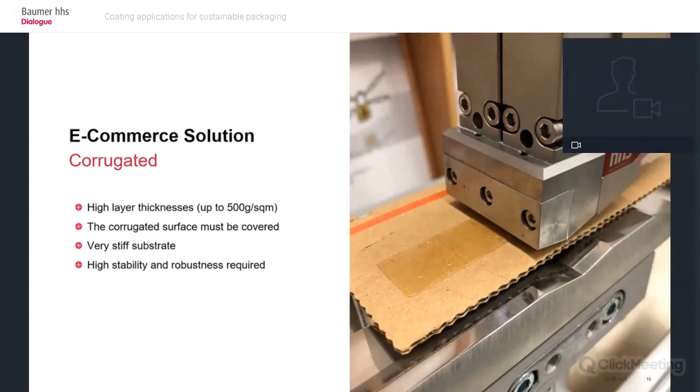There are many other applications of coatings with hot melt or pressure-sensitive adhesives. They are wraparound packaging, pouches, mailing bags, beverage cups, or paper shopping bags. Baumer HHS has already implemented solutions for all these applications - pure hot melt application, or in the often advantageous combination of hot melt with cold glue. In the following, I would like to present the Baumer HHS solutions for this area.

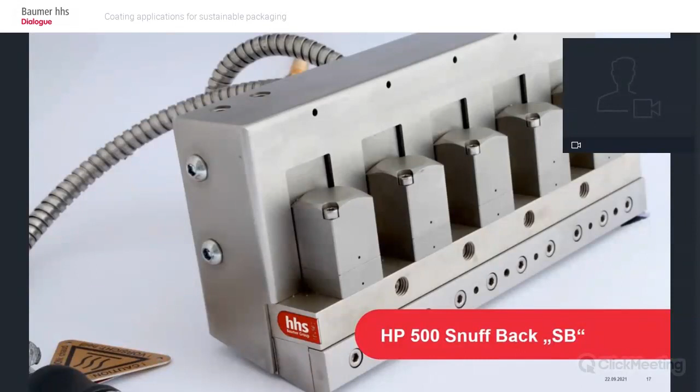As a rule, lower layer thicknesses are required, and the demands on adhesive application are higher. The top product of the Baumer HHS product portfolio for adhesive coating is the HP 500 Snuff Back Coating Head. This coating head is absolutely competitive in terms of quality and cost.

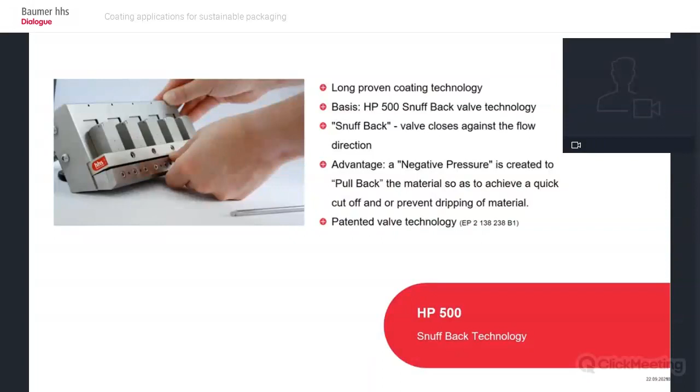What distinguishes this coating head? It is based on a proven technology. The coating head works with snuff-back technology. Snuff-back means that the valve is closed against the flow direction of the adhesive. This creates a negative pressure in the coating nozzle, with the success that the tear-off is perfect and possible dripping is avoided. The head is based on a technology protected as a European patent, which protects the compact design of the head.

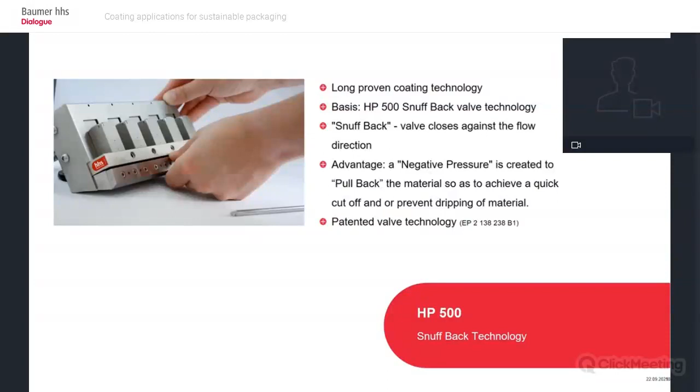The powerful model with electro-pneumatic drive offers extremely long life, reliable operation, easy maintenance, and high cycle rates with perfect track tear-off. The head has the smallest footprint of all coating heads in the market. The compact dimensions allow use even in constricted spaces. And the coating head has no external air switching valves. Nothing sticks out and can be damaged.

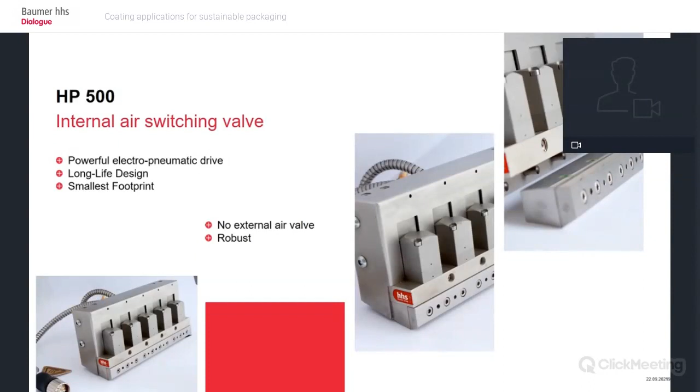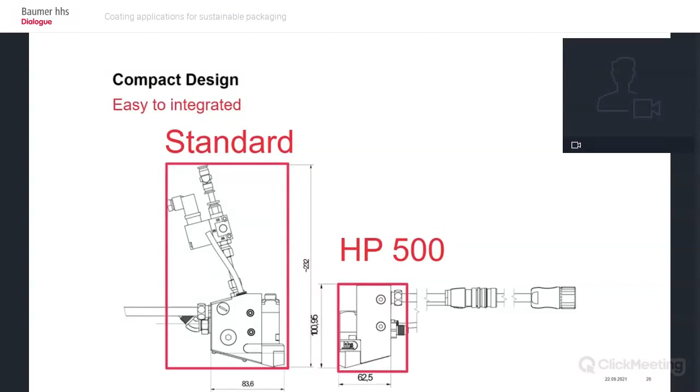The following graphic shows coating patterns that can be generated. Perpendicular to the web, the interruptions are generated by opening and closing the valves. Longitudinally to the web, interruptions can be created by trimming the masks.

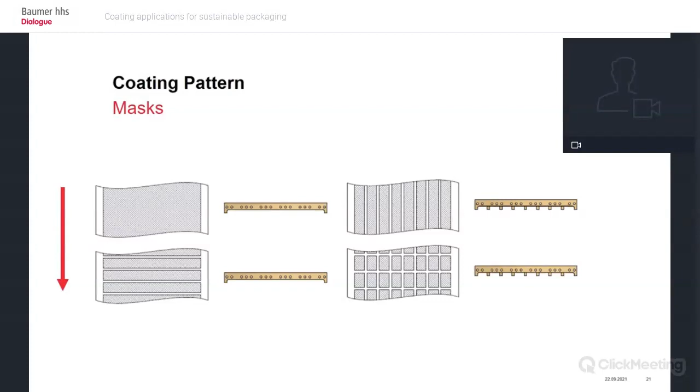We know from experience that there are usually only a few standard designs of the adhesive application pattern on the packaging machines. Therefore, it is often easier and faster to replace the entire coating nozzle together with the mask. Only a few screws have to be loosened. With only a few standard designs of adhesive application patterns, it is worthwhile to have a wide slot nozzle ready for each type of application. This saves make-ready time and reduces the error rate when changing masks.

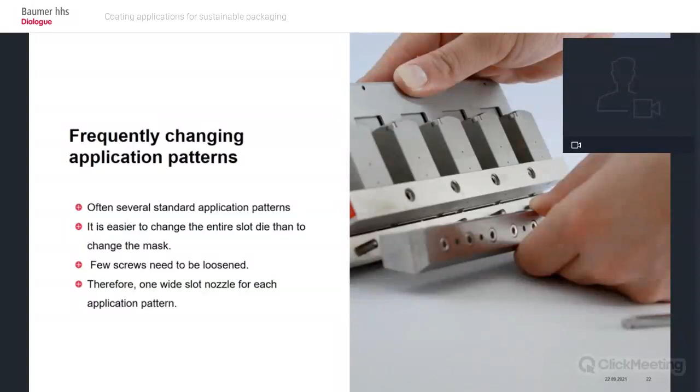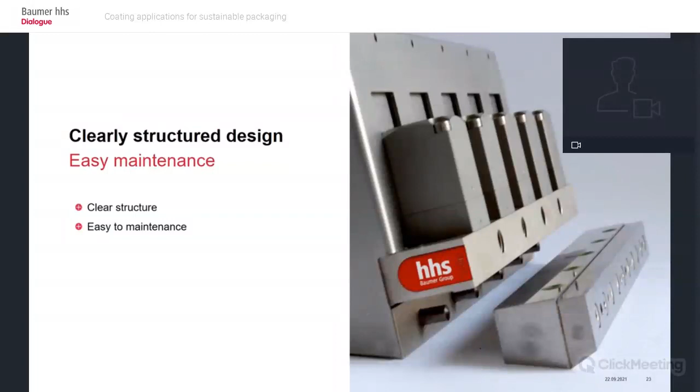The HP 500 coating heads feature a clean design. This is independent of the coating width. Anyone who has understood the design of one head will also know all the other HP coating heads. It is important to stock spare parts that are the same for all standard HP heads, of course, with the exception of the coating nozzle, which is width dependent.

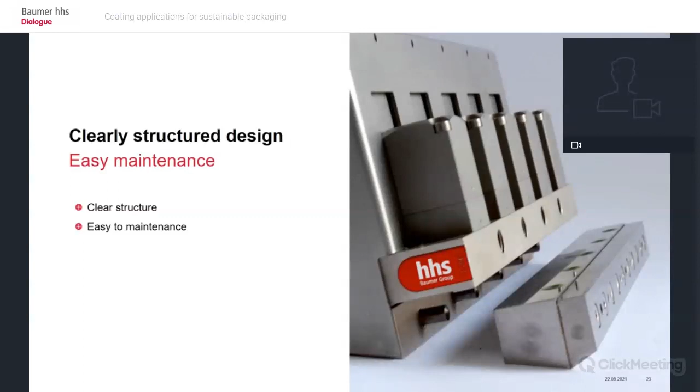The HP 500 standard coating heads are available in widths up to 500 mm, graduated in 50 mm increments. The individual coating width can be determined by the mask cut. Other widths of coating heads are available on request. The use of standard width coating heads offers you a lower investment volume, better availability in delivery, and in case of a replacement demand.

Coating has amazing parallels to art. In art, the artist's brushwork distinguishes between a blob and high-quality art. Some viewers regard some things as art, while others turn away from the work, shaking their heads.

In coating, it is comparable. The setting of the wide slot nozzle to the web determines the adhesive application quality. The angle of attack to the web plane and the immersion depth play a role. This is the brush handling of the coating.

Nevertheless, there are also very different demands on the application quality in coating applications. While one user demands the highest standards, wraparound applications often require good enough quality. We therefore need to know your requirements.

We would like to take you to our solution center. Here we do trials and customer demonstrations. We have applied a coating pattern here that we have dusted with graphite for better visibility. You can see the application of this adhesive pattern in the following film.

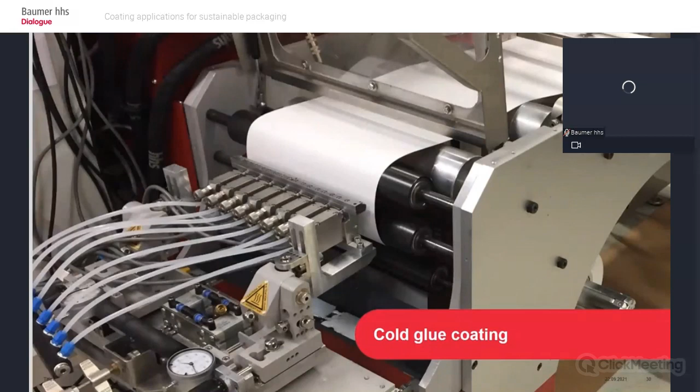An alternative to hot melt coating application is the coating application of cold glue. Baumer HHS offers a range of cold glue coating heads that feature fast switching cycles and excellent application quality. In the following we show a video of a patented cold glue coating head.

Please note the frame pattern. The following video shows the application of PVA in the form of a frame.

The application is carried out at different speeds. This is to show the possibilities that exist with Baumer HHS coating solutions. This particular head is also protected by a European and Chinese patent.

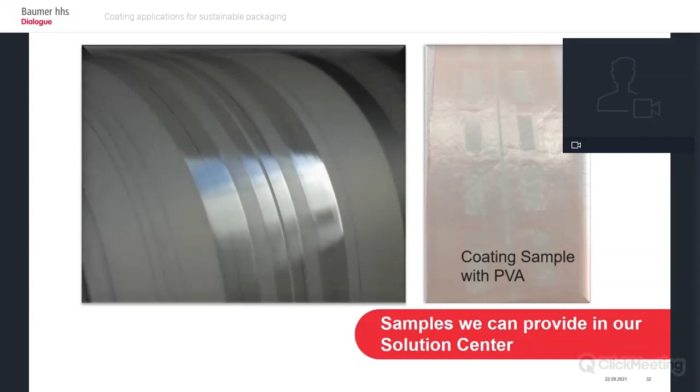The photos show a coating application with PVA. The coating was applied at 150 meters per minute.

Integration requires individual adaptation to the machine and its application. The coating head must be lifted off the substrate web during periods of inactivity to avoid burning the web.

Integration requires stringent project management. We are happy to work directly with manufacturers of the machines, equally in the case of retrofitting or new equipment. We generally look for partners for the integration and adaptation to the various requirements of the application.

Many questions need to be answered to achieve optimal results. For this reason, Baumer HHS has a coating team that handles these inquiries with confidence. Experienced personnel in research and development work in the background.

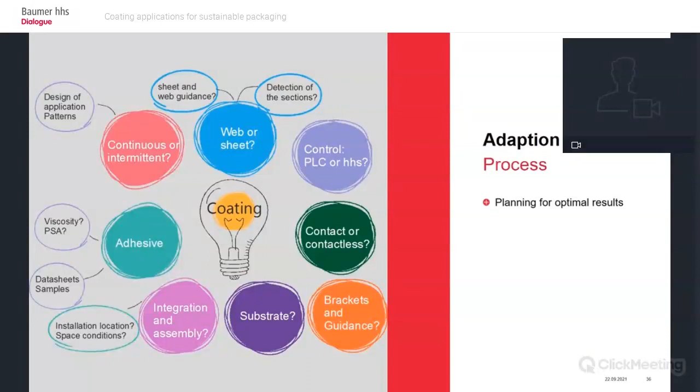We are looking forward to your inquiry. It is ideal if you send us samples of the products you want to be produced. Please send us a sketch of the adhesive pattern you want to be produced. Information on the adhesive and adhesive data sheets are helpful. We will be happy to carry out a preliminary test in our solution center with a comparable coating head.